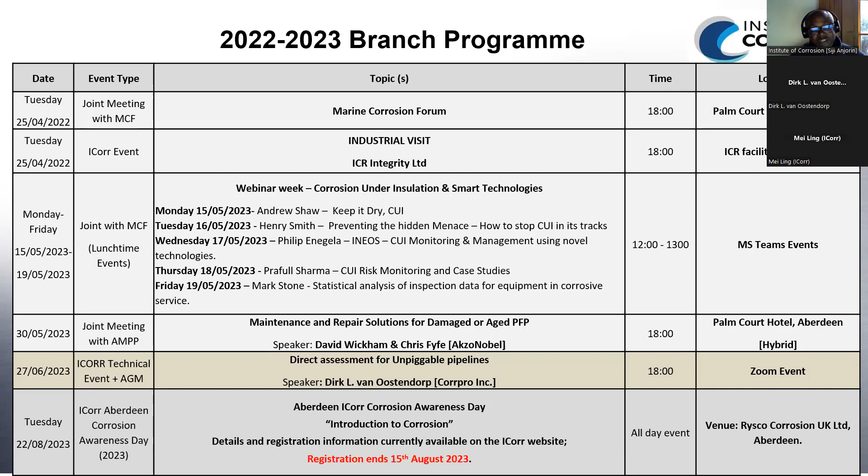Our next event is actually scheduled for the 22nd of August, and that will be the Aberdeen Branch Corrosion Awareness Day. Details and registration information are currently available on the ICorr website, but please note that registration for this event ends on the 15th of August and it will be on a first come, first served basis. The cost for attending this event is £90, and all other detailed information about the event is available on the website. I just put this up so that we can have a quick read through, but it contains exactly what I've just said. And our maximum number of attendees would be 50.

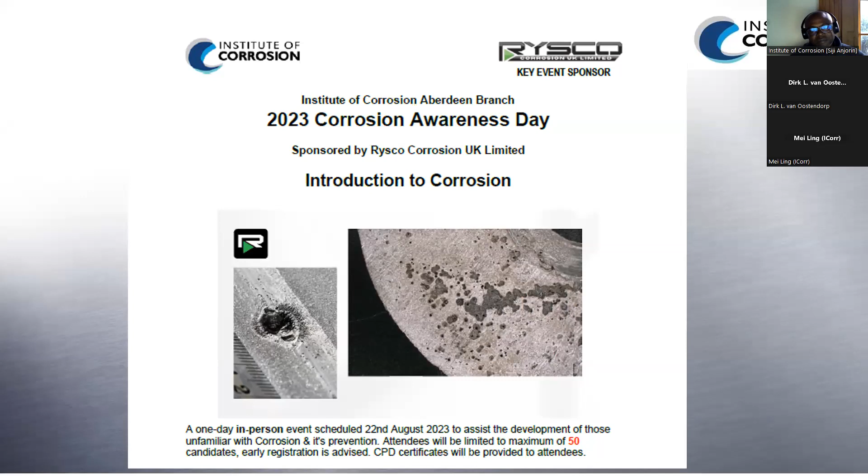So without much ado, our talk for this evening is by Dirk L. van Oostendorp. He's Director of Engineering and Technical Services for Corrpro Incorporated, based in Houston, USA. Dirk has over 40 years of global experience in all aspects of pipeline and structural integrity, encompassing cathodic protection, corrosion control, material selection, protective coatings, inspection technologies, and risk assessment. More recent experience includes integrity monitoring, failure analysis, and pipeline integrity issues.

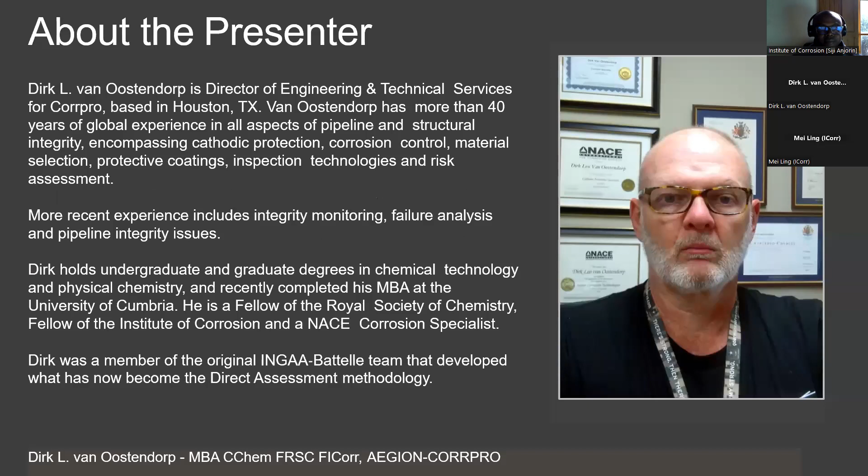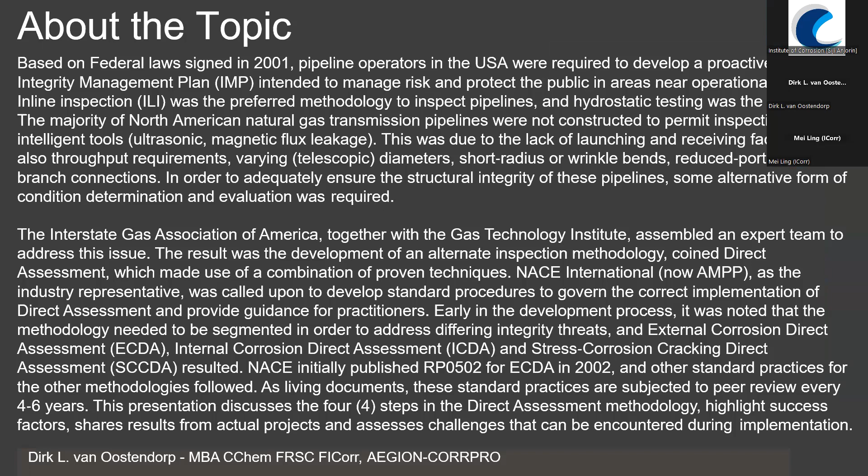So yeah, we're going to talk about direct assessment for unpiggable pipelines. We've gone through quite a bit of this background. After several large and fatal pipeline incidents back in 1999 and 2000, the federal regulations changed substantially in the United States for the pipeline operators. Prior to that, it was much more of a best practices type of environment. But now the federal government required changes to be made to become a more prescriptive process.

And so as a result of that, the natural gas pipeline companies and the products and crude pipeline companies have a slightly different approach to how they manage the integrity, and this drove a few processes to occur. So the Interstate Gas Association of America, working together with what at that time was the Gas Technology Institute, gathered a group of people in the industry to develop a methodology that would get to the same level of integrity management for pipelines as other technologies at that time.

Let's say at around 2000, 2001, inline inspection was looked upon as one of the leading integrity tools. The problem that we had in the United States was that there were thousands of miles of pipeline where inline inspection was not feasible in any sense, and would have taken large investments or major changes and modifications to the pipeline systems to accommodate the inline inspection. So by looking at other technologies and approaches, we determined that there were ways to integrate some known techniques and gather greater information out of that. And that is how the direct assessment process spawned.

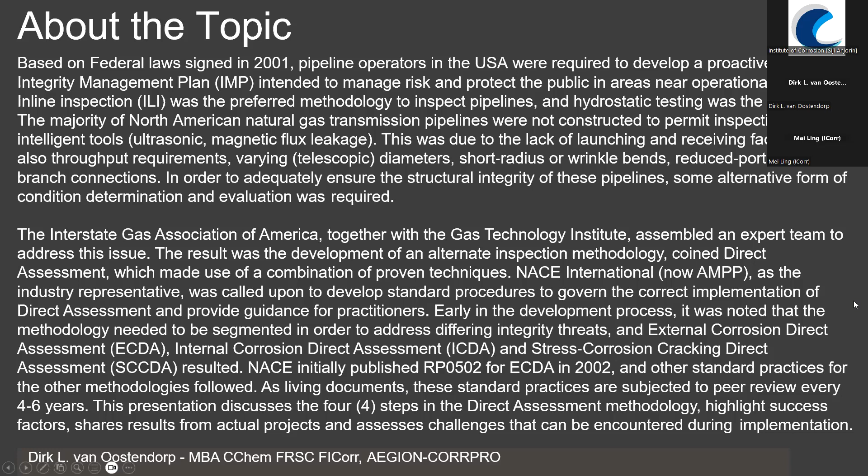It didn't take very long before we realized also at that point that a number of different variations were needed. And this is where external corrosion direct assessment, ECDA, internal corrosion direct assessment, ICDA, and stress corrosion cracking direct assessment were then sort of broken out. And initially back in 2002, NACE International, now AMPP, came out with the first draft of the recommended practice 0502, which was then pretty much accepted by the US Department of Transportation. Part of that four-step process, at the end, the post-assessment is where the operators had to look at the reinspection intervals based on corrosion growth rate for the implementation of the process.

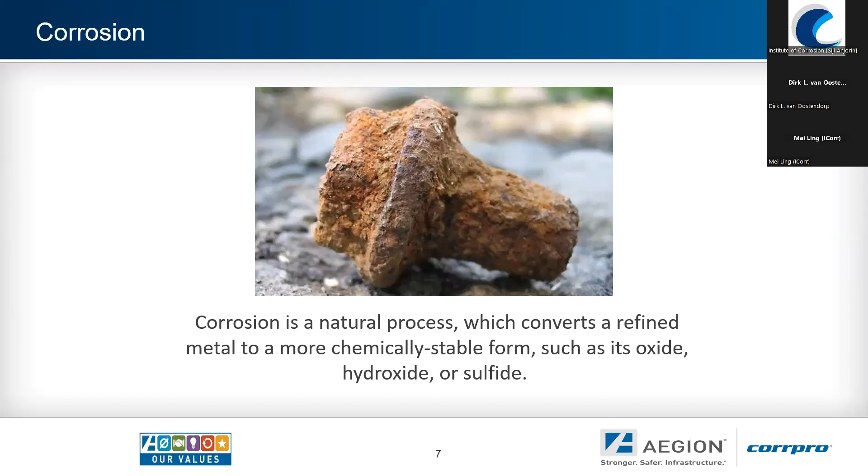So we're going to talk a little bit about some of the background in a bit more detail, and then I'll present some data from some case studies that we've done recently, which kind of show what the results would look like. So again, corrosion, no surprise to us, it's a natural process. Refined ferrous metal objects, whether it's a pipe, tank, or whatever it may be, when exposed to the standard environmental conditions of either being submerged or in soil or in the atmosphere, are going to corrode to a more chemically stable state, like an oxide or a hydroxide. As a result, it's going to change its mechanical properties.

When we speak about pipeline integrity, DNV has a very nice definition there. That is the ability of a pipeline system to operate safely and withstand the loads. In Corrpro, we've kind of taken a slightly different tack on that, but we also want to make sure that the current condition of the pipeline allows it to continue in its designed operating conditions, and that the predictable risk of failure can be reduced and managed to some degree.

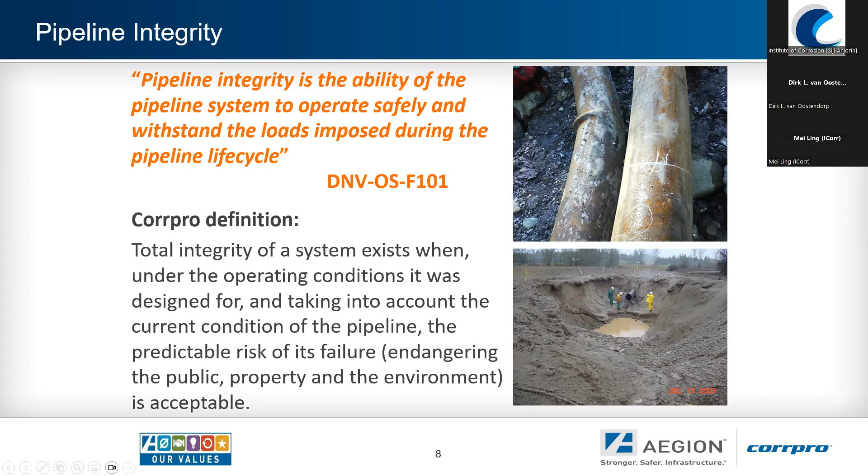So again, public safety and property protection is a key component of that. So where it all began, as I mentioned, this was back in around 2000 in response to a couple of large pipeline accidents at that time, that a team was assembled. The whiteboard on the side there is actually the whiteboard in Columbus, Ohio at Battelle's institute there. Dr. Brian Leis was nominated as the leader of the team.

Brian was an amazing person to work with. He had years of experience with pipeline safety and pipeline predictive diagnostics there. I think the big thing that made this project successful was that we engaged early on with the federal regulators from the US Department of Transportation to keep them apprised of where the process was going. Although they could never actually approve or disapprove a process, being accepting of it would allow it much greater application for the pipeline operators.

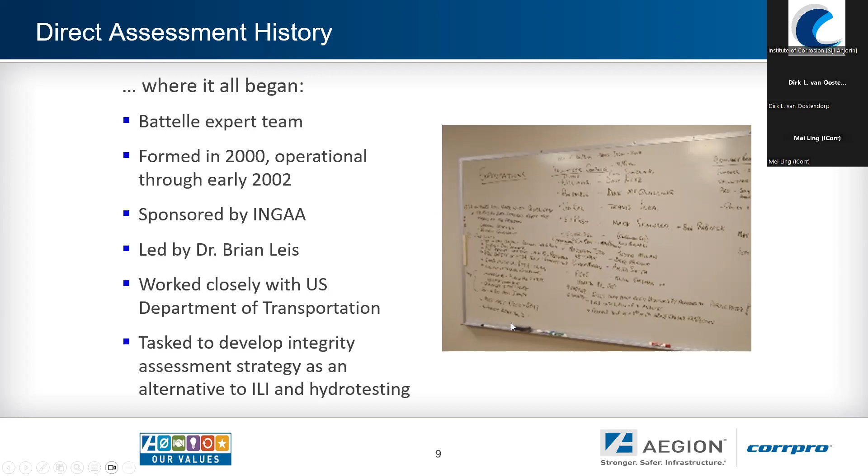And then the ultimate piece of this was the task that we were assigned was to develop some sort of integrity assessment strategy as an alternative to inline inspection and hydrostatic testing, simply because a lot of the pipeline systems were not suitable. It was unfeasible to use either of those techniques. So that's sort of the history behind that. On the other side, there was the regulations that came out.

So in 2001, pipeline operating companies in the United States for interstate pipeline systems were required to develop an integrity management program, a pipeline integrity management program. It had to be a written and prescriptive process. Best practices were no longer acceptable, so there had to be a very prescriptive document that was then auditable by the federal authorities. Again, in 2002, NACE at that time published the first pipeline external corrosion direct assessment methodology.

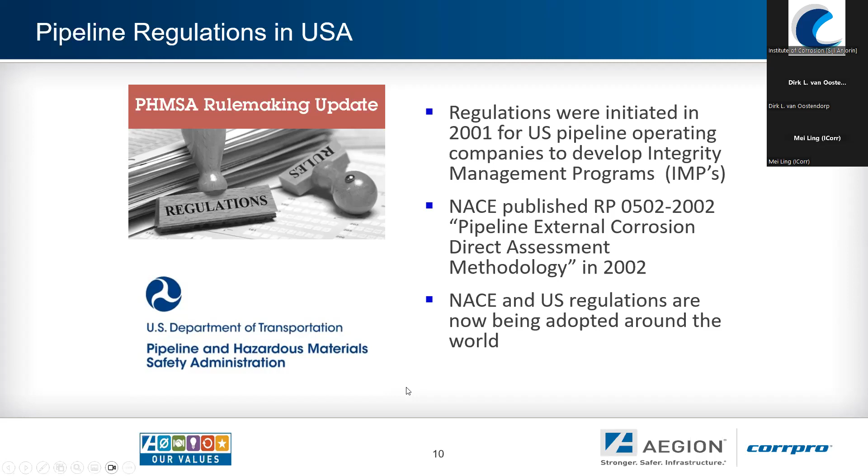And we're starting to see more adoption of some of the NACE or now AMPP recommended practices being accepted in other parts of the world, Central America, for example, in Mexico quite heavily, and other locations as well. So what is external corrosion direct assessment? It's a structured process, and that is what appealed to the regulatory folks. When it's structured, they can actually follow the individual steps that are required and assure that there's compliance there.

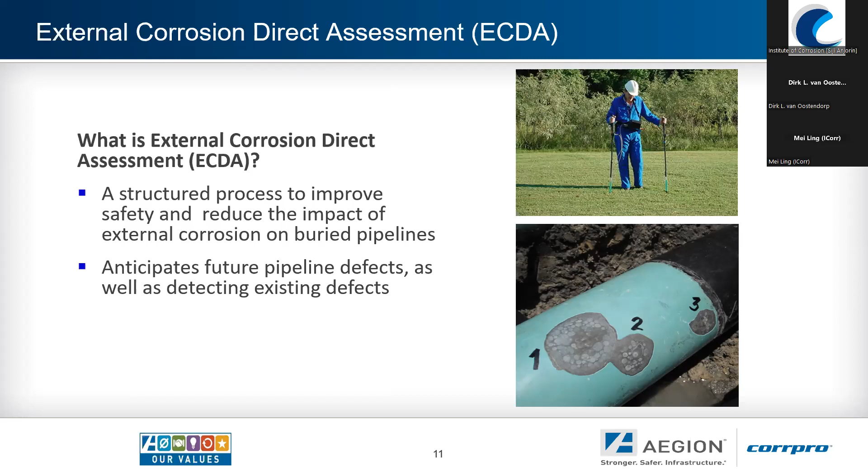So the important point here was to improve the safety and reduce the impact of any external corrosion taking place on buried pipelines. The next part of it was somewhat predictive, in that it would also then allow operators to understand where the anomalies were, predict any sort of ongoing corrosion, and then in a prioritized manner address these additional locations on the buried pipelines.

0502 again has come out originally in 2002. There have been multiple revisions to it since it is on the cycle. I think the important part here is we did it in phases so that there are 4 steps. The pre-assessment step is important and often the most underestimated as far as importance and also effort required.

The pre-assessment step is designed to review available information and knowledge with regards to a pipeline system, and determine at that point whether or not external direct assessment as a process is applicable, if there's sufficient information to justify it. And also at that point, in the pre-assessment, determine which tools will be acceptable based on the condition of the pipeline, based on physical parameters and topography.

From there, it goes into the indirect inspection phase, which is typically your overline surveys along the pipeline to gather the data. The back end of that phase is then the data correlation and risk ranking, which leads to the direct examination phase, prioritized excavations to actually inspect the pipe at pipe depth, conduct some additional in-ditch testing on the pipeline,

and then the post-assessment phase is the back end to actually demonstrate that all 4 phases have been completed, demonstrate that the information provided out of the pre-assessment actually did lead to a successful application of the technology. There's a corrosion growth rate calculation portion to the post-assessment, which then also drives the required re-inspection interval for the external corrosion direct assessment application.

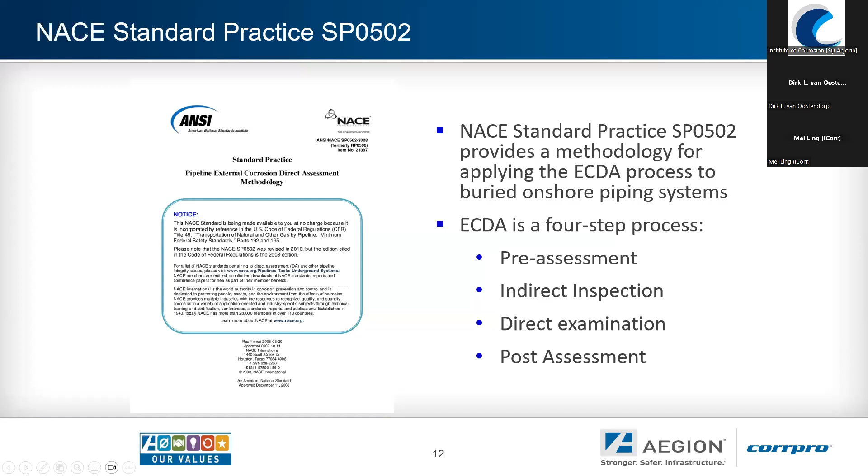So as with any good tool, we do know that there are limitations. And this was one of the discussion points with the federal regulators when we were going through the assessment of the process. In cases where there are disbonded coatings, external corrosion direct assessment struggles very, very much so, because the disbonded coatings will then isolate sections of the pipeline, and there is no way for any of the overline techniques to be able to sort of identify defects at those locations.

Another area is where the surfaces, if you have pavement or reinforced concrete in areas where there's frost, the use of standard techniques like CIPS and DCVG and even some of the electromagnetic techniques suffer, so the accuracy is compromised. They're not possible.

However, there are ways to get around that in some cases. For example, in pavement, as we see in the photo, there are possibilities to drill small pilot holes and use those as a means to maintain the contact, but that's not always feasible as well.

One of the other big considerations is where the measurements can't be conducted in a reasonable time frame, where there's limitations as to how quickly the different techniques can be conducted on the same pipeline.

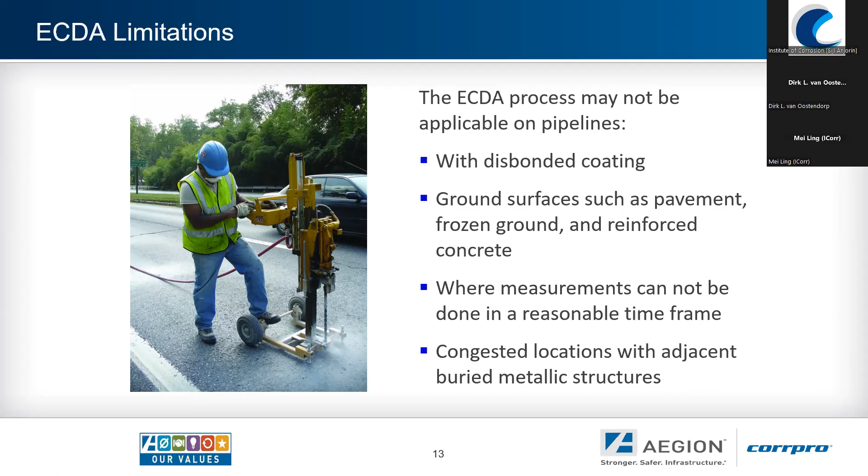And lastly, if there's a great amount of congestion, so for example, in some of the large cities, where there are pipe type cables, multiple different underground utilities, conduits, duct banks, and all of the other structures. Under those conditions, there may be limitations as far as shielding or data biasing with respect to the external corrosion direct assessment process. So these are all taken into account in the pre-assessment phase when trying to determine if it's feasible and which techniques would apply.

From there, the next step is actually going down and doing the excavations after the surveys have been completed and areas have been identified. Here was a location where there was coating damage caused on the pipe. You can also see that there's gouges that resulted. It was a case where one of the cable companies was doing excavations and they crossed over this natural gas pipeline, hit and damaged the coating on the pipeline, and it was never reported. So the ECDA process did pick it up and identify it.

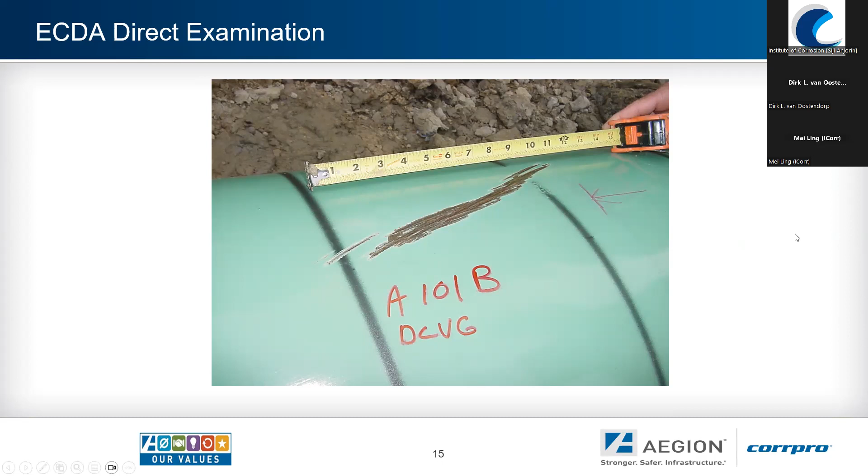When it was found to be aligned with some above ground markers from the communication cables, that's when it was prioritized for excavation, and also one that DCVG picked up very accurately as far as position.

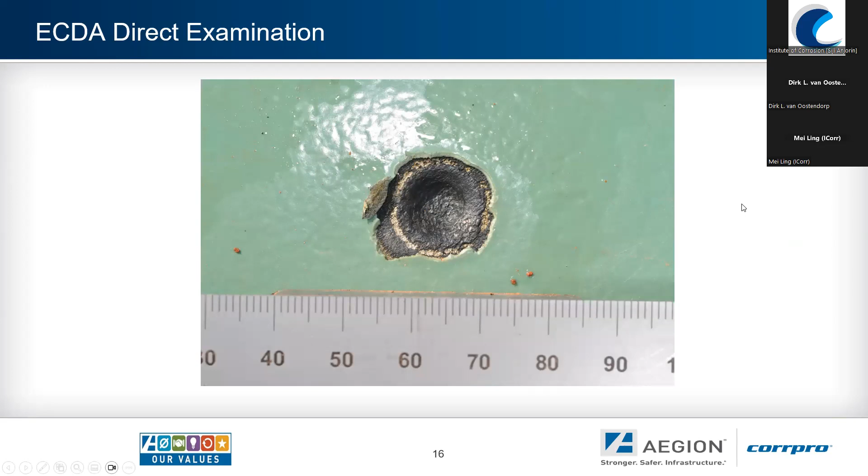Switching gears to stress corrosion cracking. This one has some other considerations that one has to take into play, for example, the location of the pipe, the depth of the pipe, the depth of cover. So for those pieces, we typically would use something like a pipeline current mapper to accumulate this data. The pipe elevation is a large part of that as well. So usually sub-meter data to get the geospatial alignment.

This is important for the determination of the slope magnitude, whether we have a consistent slope or if there's any abrupt changes in the topography. Soil characteristics, so drainage, wetlands, and then soil characteristics as far as corrosivity become a big important factor to that. We also know that soil pH is a contributing factor in many cases to SCC.

Coating defects usually are aligned and allow for collection of water, groundwater, that then undergoes some changes on the pipe surface. And then also cathodic protection deficiency. So marginal CP is also a known contributor to several forms of SCC.

It's rather interesting that if there is past ILI data, that can also get factored into this. For example, when we're looking at things like unusual appurtenances, pipe bends, river weights if it's going through wetland areas.

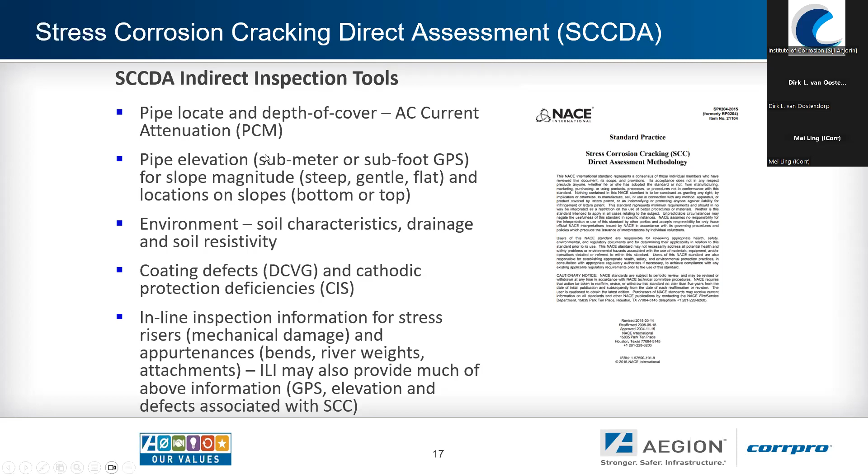ILI is helpful in that, especially if there was a geo module run on the ILI run, to be able to sort of get the elevation more accurately as well for verification. Probably one of the uglier looking stress corrosion crack colonies that we were able to detect in this approach.

SCCDA gave us an area that was prone to it. Using a couple of the techniques, we found a specific coating anomaly where the potentials were low. The soil was rather alkaline, and when it was excavated and cleaned, the crack colony, we didn't even need NDT at that point to prove it out because it's pretty apparent.

The good news is the cracks had not coalesced to failure point, but it was quite encouraging to be able to identify it this accurately. And the pipeline operator ultimately ended up having to cut this section of pipe and do a replacement because composite reinforcement wouldn't have satisfied the mechanical requirements at this location.

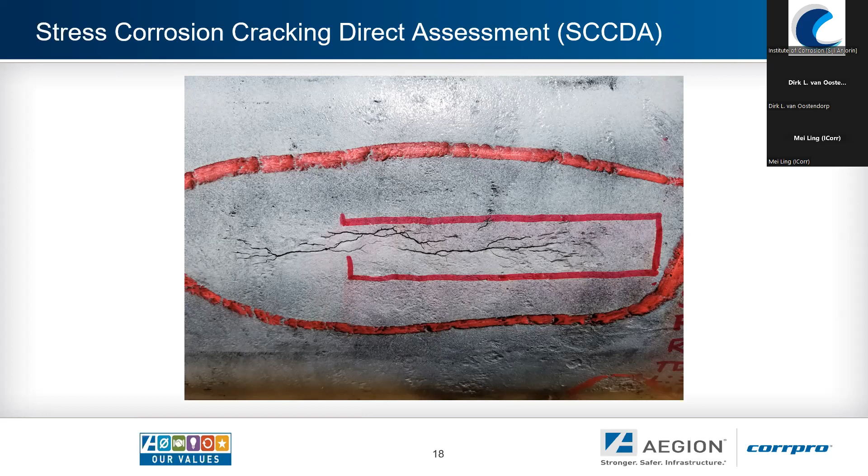So let's switch gears just a little bit, and we'll talk about internal corrosion direct assessment. This one's a little bit more complicated in some ways, and still a four-step approach, but there are certain other factors that we need to take into consideration. So again, it's still the structured approach. One of the things that we try to do is anticipate where we may have future locations along the pipeline where defects could be progressing.

And so from the internal standpoint, if we're thinking about the natural gas side in particular, one of the things we're looking at is exactly where we do have water accumulation, water pooling, and where there's enough momentum of the flow stream to be able to carry the water through. So there's the inclination angle, and we get to the critical angle assessment to determine where that water is going to get trapped and where it's going to carry through.

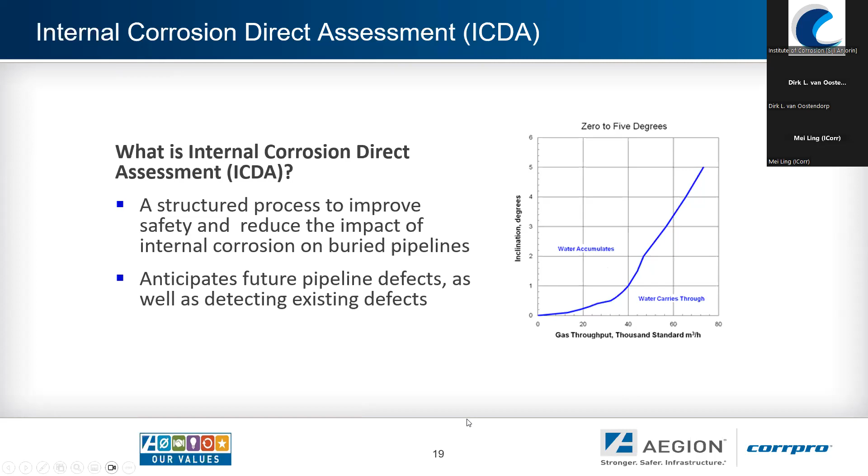The initial ICDA protocols were released in 2006, and that was for liquid petroleum pipelines. They were somewhat easier to assess, and so that was the first one that was treated.

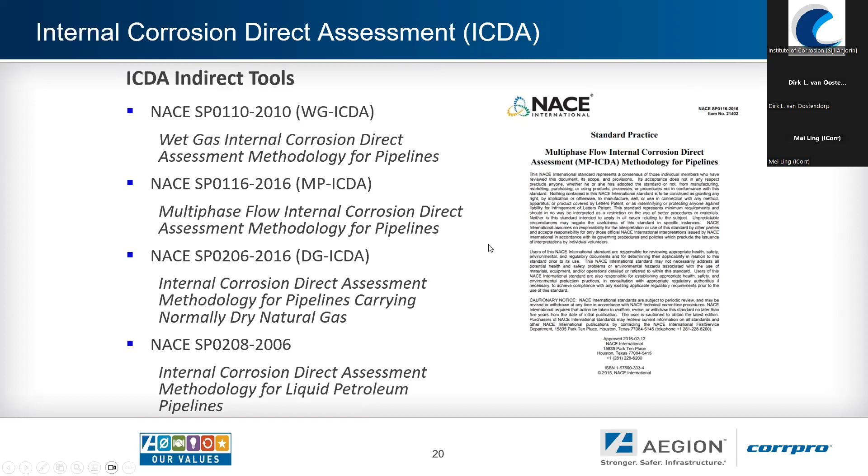After that, we understood the differences between wet gas, for example, multi-phase flow, and then finally, there's a condition where if you have large cross-country gas pipelines that are transporting what would be considered normally dry gas, with the exception of, let's say, dehydration interruptions or anything like that, there was a separate standard practice that NACE released for these. So from the ICDA standpoint, there are four different standard practices to follow depending on the conditions of the pipeline that we're going to be looking at.

So one of the first things we're looking at is a reference to 192.927. So that is a direct piece out of the federal regulations, which sets out some of the requirements for how one needs to assess the internal corrosion on the pipeline.

So the first thing we're looking for are areas along this particular pipeline that's under study where water or any other electrolyte may accumulate. This can be water that's trapped in the flow stream itself. It can be water that forms due to condensation. Closer to production systems, it's also possible that there's water carryover from the dehydration process, or again, interruptions in the dehydration that allow wetter gas into the system.

What we want to do is really focus our attention along this pipeline on the areas where the internal corrosion has the highest likelihood, following the four steps again, as we did with the other direct assessment protocols. If an operator has included ICDA into their integrity management plan, there are a few more pieces that are required by the federal regulators. So one of them is, for the very first time that one applies the internal corrosion direct assessment process, the criteria is a little bit more restrictive as far as demonstrating the applicability.

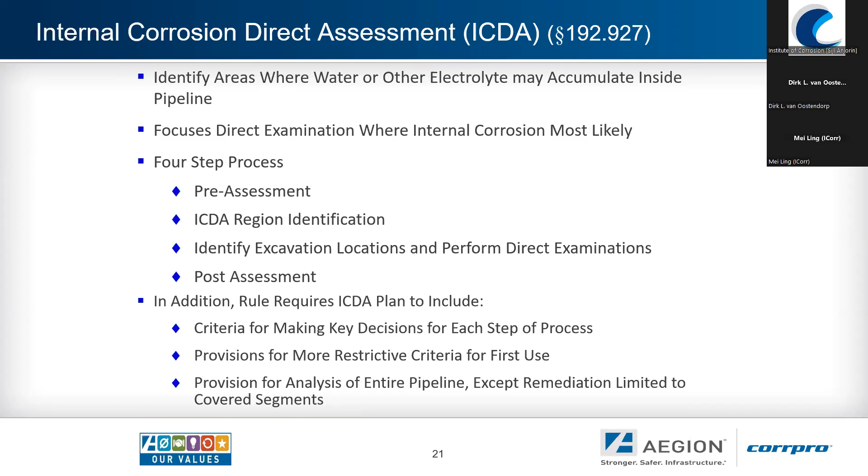So the pre-assessment phase here is gathering the data, making sure that the ICDA process is feasible and applicable, and then begin to start to look at the modeling that's going to be required in order to determine the movement of the electrolyte and water in the pipeline, identify the specific regions along the pipeline where internal corrosion could be a concern, and then compare that with these high consequence areas. Look at the accumulation point or where entrainment may be taking place.

Data information, important pieces here. All the data elements that are considered by ASME B31.8S, the physical and historical operating parameters must be available for inclusion in this. Information for the model. So if we're thinking about running a flow model to do these calculations, typically we would use something like Olga in order to make this sensible.

There's quite a list of important pieces of information, such as the flow rates, the pressures, the temperatures of the flow, the chemical composition, all of these pieces together, along with detailed information on the elevation profile of the pipeline that allows us to look at the low points and actually do the critical angle assessment.

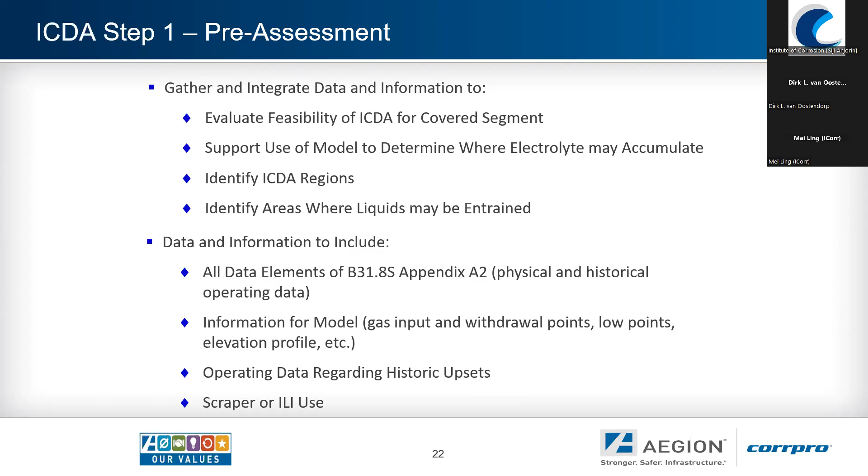So the region identification then is another issue, as I mentioned before, because the federal regulations focus mainly on the high consequence areas or now moderate consequence areas. So although you may be working across an entire pipeline section, there may only be specific areas where you need to have this level of detailed information.

Oh, I just saw a question pop up. Billy, for subsea pipelines, the answer is yes. That is true. These can be applied to basically any of the pipelines for gas and liquids, both onshore and offshore. So the approach would be there. The data requirements, I think, is the piece that's the stringent thing. So for offshore, you would need a very good detailed profile of that pipeline.

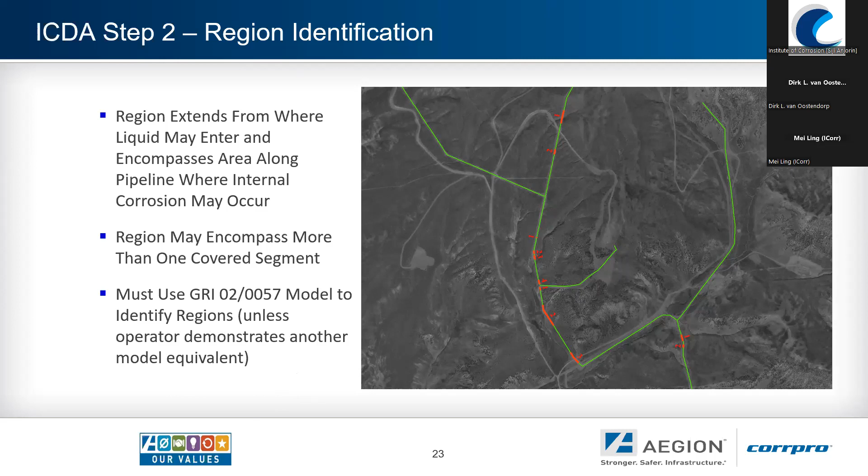So then we turn into the flow simulations. This is, again, quite a process. We start to develop the digital elevation model, electronic wire line of the route of the pipeline, the topography of the pipeline and profile in 3 dimensions. So wherever there's changes or bends or whatever, that's all taken into consideration. We do the inclination angle, the critical angle assessment to sort of determine if there's any specific areas where water holdup may become more of a problem.

And then one of the key things is to evaluate the water residence time. I'll talk about that and show examples of that. But when we start thinking about this, there's steady state models and there are transient dynamic models, and a big difference there. The best way to think about that is that the steady state model assumes uniformity of the flow stream going through the pipeline, and that if there's any water in the gas or in the product, it's going to be uniformly dispersed. And that may not necessarily always be the case.

And this is where that transient dynamic model becomes critical for the analysis, because you can have the water present in many different phases. It could be sort of emulsified water in there. It could be droplets that are moving, and the droplets may be moving at a different speed than the flow around it. You can actually have stationary water films that get stuck at welds or other low points. You can get a stratified film where it separates out from the flow stream and starts to move along the surface of the pipe at a specific part of the circumference of the pipe. So these are very important to consider, and this is why my personal preference is working with a program like Olga.

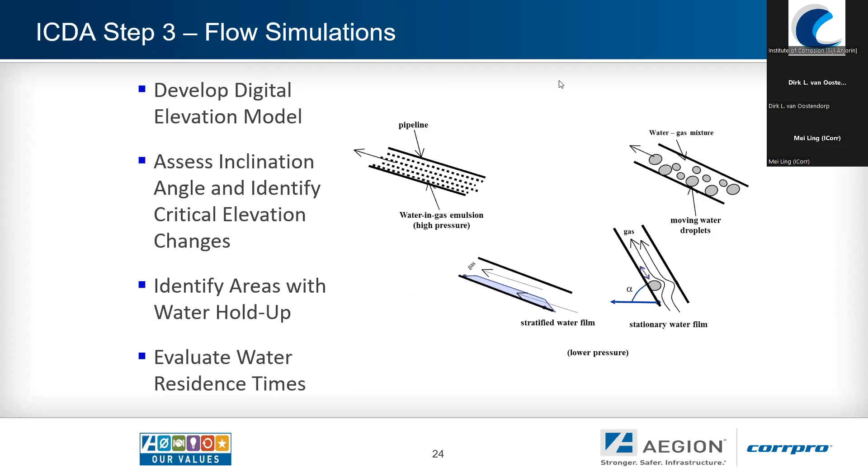So let's take a look at some real data. Here was a dynamic analysis that was done on a specific pipeline. Looking at the lower half, you'll see the dotted green line. That is the profile of the pipeline in meters. So going down a hill, going across a flat area, and moving back and forth. It was a natural gas pipeline, actually gas and gas condensate.

And so when we ran the model and then turned on the composition tracking, we could actually start to see the gas fraction, the water fraction, and the condensate fraction as to where we would have water dropping out. And so it becomes rather visual. You can see where the water is the highest concentrations.

So at about 126 meters down the pipeline route, you'll see that there's a large area of water that's potentially being trapped there. But moving over to around 209 meters, you'll also see a peak there. So there is some carryover that gets trapped at the top at that plateau.

Moving over to the area between 300 and 378 meters, you would normally think that in a low point, that's where the highest accumulation of water is going to be. But in this particular case, that wasn't true. It was actually on the uphill portion of that next pipeline rise. And then there was carryover, which allowed water to deposit on the downslope side at around 540. So this is where the composition tracking became very helpful.

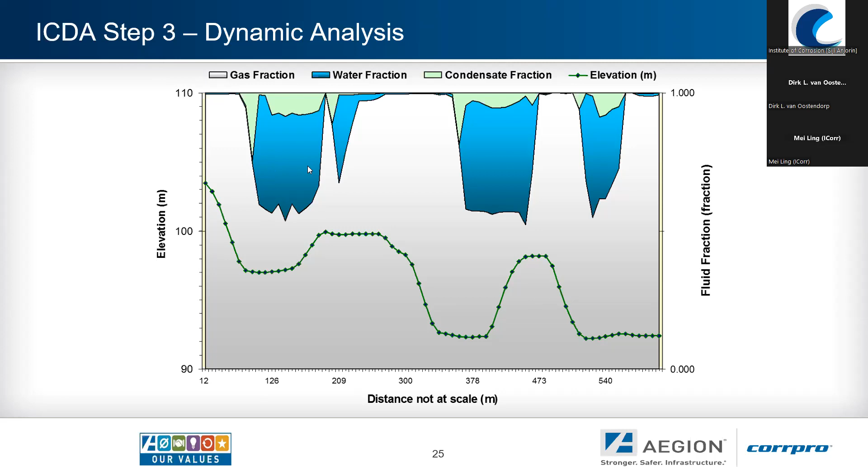So once we have the composition tracking, the next piece is to then project this out in a little bit more detail. And I mentioned the residence time of the water because that's a critical element to us. Even though I may have a high mole fraction of water, if that water is moving through the pipeline rapidly, it's not going to become a concern for us, or lesser of a concern than areas where I have trapped water. And so in this particular case, what we then did is use the transient simulated portion of the Olga model to take a look at the transit time of the water through there.

And so you can see that in some of the cases, we were looking at water residence times in tens of hours. Whereas in other areas, we were in the 12 to 15,000 hours of residence. And so, interestingly enough, when we projected out known smart pig indications, ILI indications in this same area, we could see that this lined up very well with the areas where we had very high water stagnation, where the water actually resided in there for hundreds and thousands of hours of time. So, the confidence there was quite good.

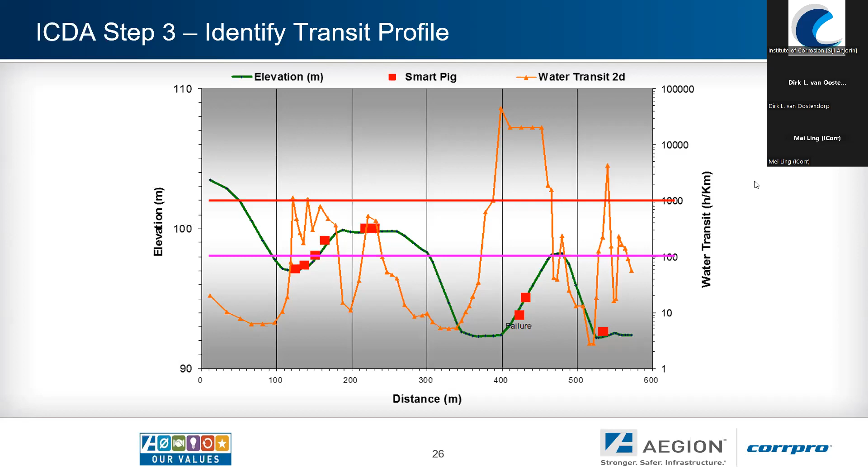In the one case in particular, I think it was the second location downstream, what we found is that with the dynamic modeling, there was almost a reflux situation that was taking place there, where the water would actually rise up the uphill slope, but then start to slide back down because there wasn't enough momentum in the gas stream to push it all the way. So there was almost a reflux at that particular location. And that was an area of interest to us for further inspection using NDT.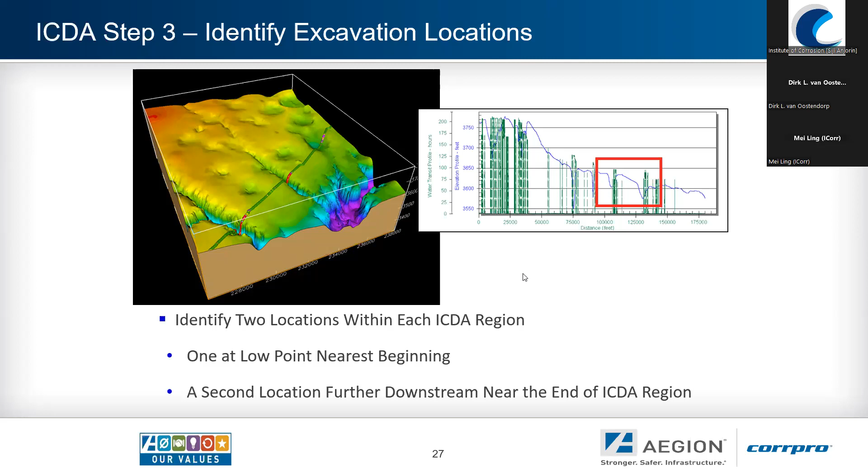The direct examination in the case of the internal corrosion is not quite the same as what we do for ECDA. Of course, it's on the internals. So typically we would end up using something like long-range guided wave ultrasonic as the first tool to assess for the internal corrosion and do the confirmation. If there are indications found and confirmed, this is where something like phased array or automated UT would be used to map it out further.

According to the regulations, if there is any corrosion identified, it's important to evaluate the overall severity of the corrosion at that location, identify potential remediation methods. If there are any discrepancies, it may be necessary to conduct additional digs. And this is where it sort of gets a bit awkward, because you're also then required to evaluate the potential for internal corrosion, even if it's not in these high consequence areas. But if there's a severe location that wouldn't be from a public standpoint, they will also require further investigation.

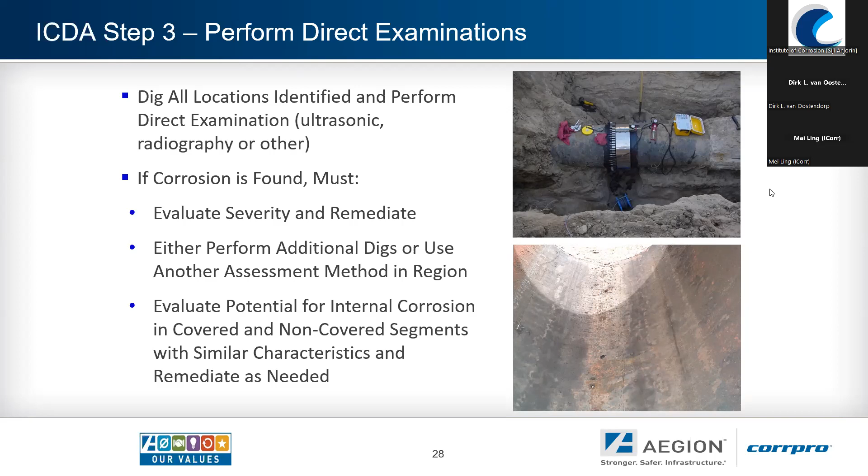So on the photo on the right top, there's a guided wave tool being installed on the pipeline to do the shots. Bottom photo, this was in what the operator was convinced was a dry natural gas pipeline. Yet if we look closely, we can easily see the water tracks from where the water was flowing along the bottom of the pipeline. And there at the very bottom, at the 6 o'clock location, there's plenty of corrosion with several very large metal loss pits in there. This is where ICDA determined that there was water sitting in there for about 3,000 to 4,000 hours before it would actually move through. And so there was a constant flow, but there was also water trapped in there. So good confirmation for the technique being functional and working.

The post-assessment phase, then we have to look at the overall effectiveness, demonstrate that it really worked. If there was any corrosion identified, complete root cause analysis to understand what was causing the problem. Update the risk assessment. This is a requirement as well. Kind of a standard format is shown on the top left there in a risk box. If there are any complications or sort of blind spots found in the technique, it's necessary to change the inspection strategy.

And then if there are severe enough locations with corrosion taking place, but not to the point where they mandate repairs, continuous ongoing monitoring may be required. And that can consist of online chemical analysis of the liquids that are flowing through the pipeline to monitor any trends for the corrosive elements. It can also go to installation of permanent UT sensors or electronic probes at the specific locations. As seen there on the left, there's a PermaSense UT detector at the top of a 90-degree elbow, which was found to be a highly corrosive area. And then similar to the other direct assessment processes, one is required to determine the reinspection interval based on corrosion growth rates. So those are all the steps in the process there.

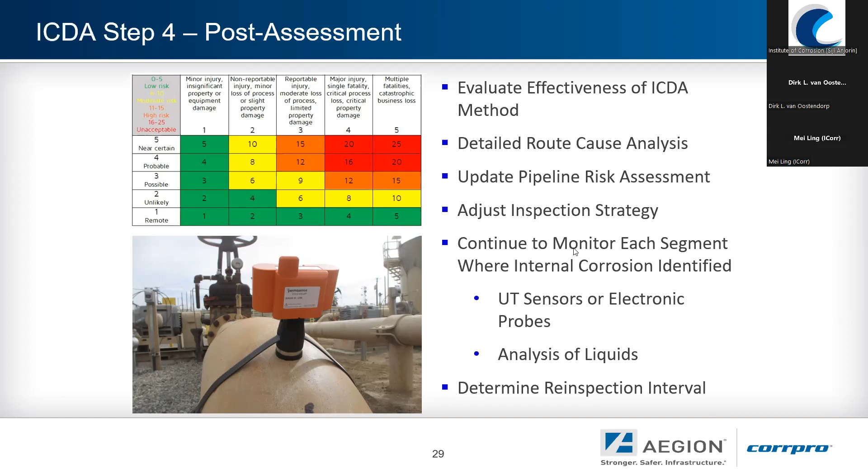I'll give a couple of really interesting case studies. So this was a comparison, a blind comparison between ILI results and ICDA results. Using the pipeline inclination profile and the flow modeling, it was possible to identify areas where water retention may have been an issue. And when that was then compared, it matched up quite well with exactly where the ILI defects were identified. There were a certain number of ICDA sites that did not necessarily have resulting corrosion or very minor corrosion, but the majority of the results lined up incredibly well.

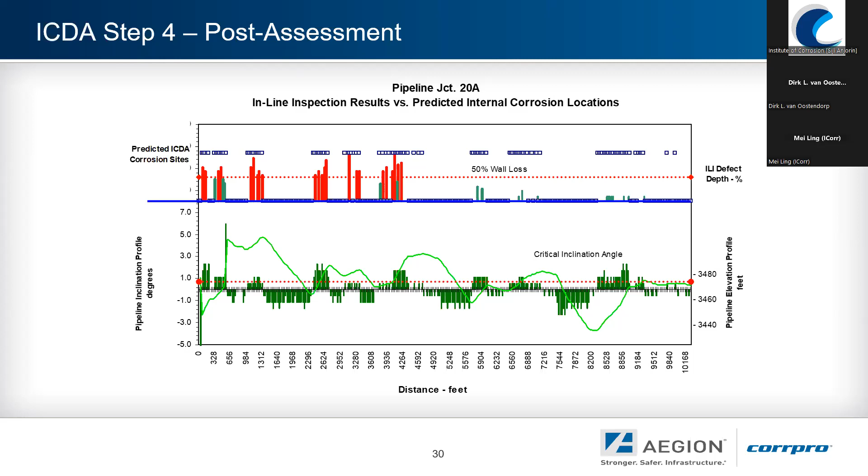So you can see the small bands going across the top. Those were the predicted ICDA corrosion sites, and the red and the green were metal loss anomalies identified by ILI, and the critical depth is 50% at that point. So very good alignment there between the real data, real pipeline data. And I think that brings us up to the end of what I had.